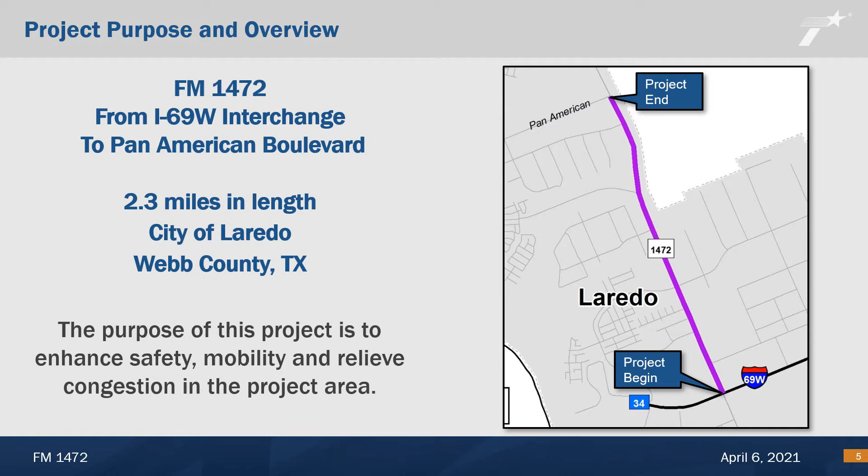Important considerations for the proposed project include enhancing safety and mobility, minimizing right-of-way impacts, reducing delays, relieving congestion, improving traffic flow, and providing alternative local access. The FM 1472 Operational Improvement Project improvements include innovative intersection improvements and traffic signal timing improvements.

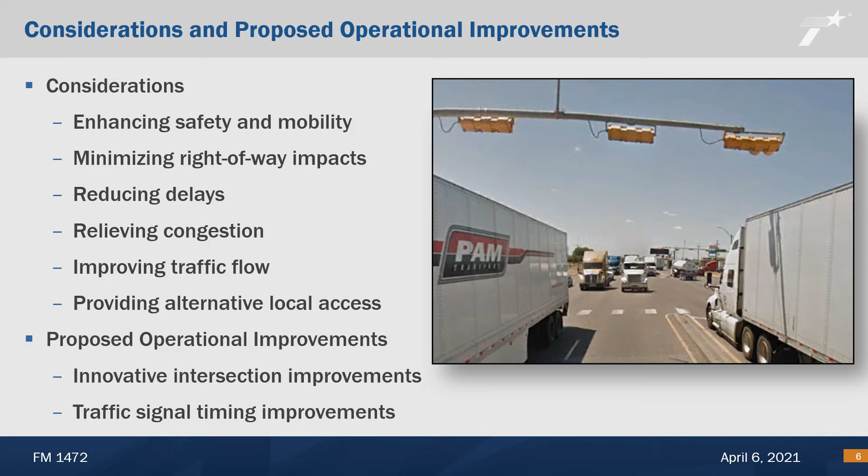Traffic on this corridor is currently experiencing long delays and congestion due to high traffic volumes. This corridor is located adjacent to the World Trade Bridge in Laredo, Texas, which is the busiest inland port in the United States, and the adjacent land uses generate a large percentage of heavy truck traffic. The goal of the project is to improve safety and increase the traffic carrying capacity, or the total number of vehicles able to travel on FM 1472.

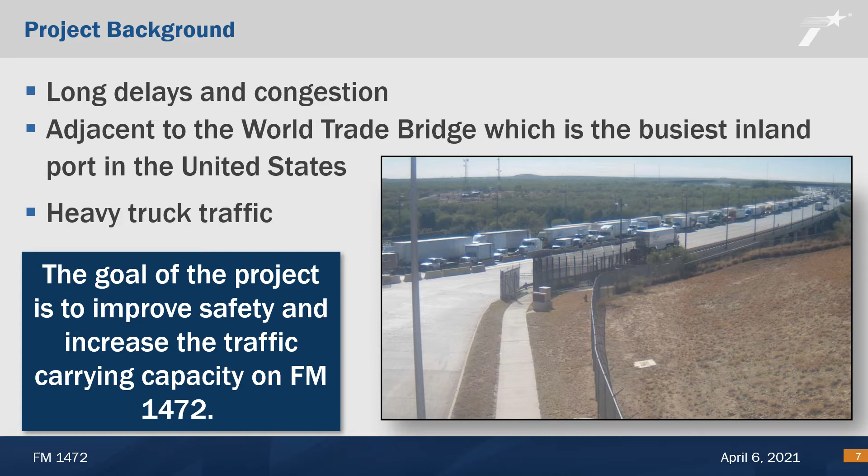Shown here is the proposed four-phase single-point urban interchange to be constructed at the interchange of FM 1472 and I-69 West. The four phases of the interchange will be shown individually on the following slides. The proposed configuration would allow for concurrent left-turn movements from FM 1472 and concurrent left-turn movements from the frontage road approaches. The concurrent movement would allow for a reduction in the cycle length of the signal and would reduce congestion and queues at the interchange.

All intersections shown throughout the presentation have conflict points. A conflict point is a location where traffic paths routinely cross, merge, or diverge. Reducing the number of conflict points at the intersection would improve safety. Conflict points at this intersection would be reduced from an existing 48 to a proposed 24 points.

Phase 1 would allow for northbound and southbound left-turn movements from FM 1472 as shown by the purple arrows. Phase 2 would allow northbound and southbound through traffic and right-turn movements as shown by the yellow arrows. Phase 3 would allow eastbound and westbound left-turn movements from the I-69 West frontage roads as shown by the orange arrows. Phase 4 would allow for eastbound and westbound through and right-turn movements from the I-69 West frontage roads as shown by the blue arrows.

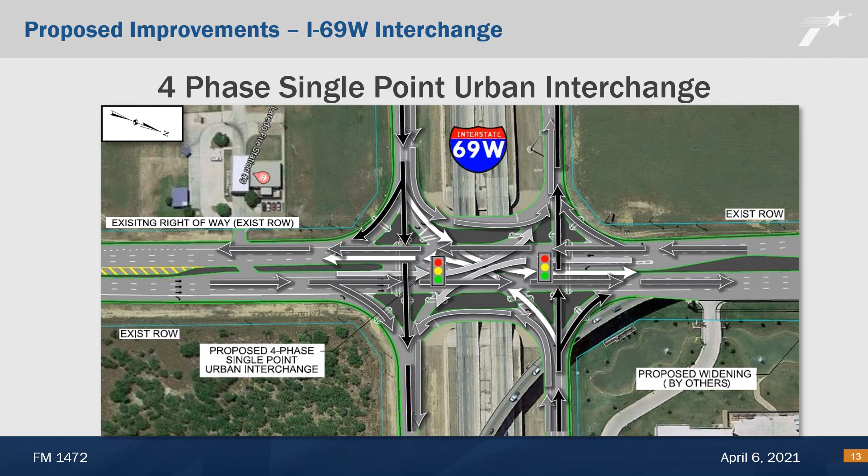All traffic movements, shown in grayscale, for the proposed interchange design allow for an anticipated reduction in overall intersection delays anywhere from 32% to 46% during the peak traffic periods. Conflict points at this intersection would be reduced from an existing 48 to a proposed 24 points.

Shown here is the proposed continuous green T intersection at Milo Road and FM 1472. The proposed improvements would allow through traffic on southbound FM 1472 to travel through the intersection without stopping at a traffic signal, as shown by the white arrows. Left-turning traffic on FM 1472 southbound would use the left turn lane shown by the blue arrows.

Westbound traffic on Milo Road would use a channelized left turn lane and would merge onto FM 1472 southbound traffic, as indicated by the yellow arrows. Northbound FM 1472 traffic would stop at the traffic signal, as indicated by the black arrows.

The conflict points for the proposed intersection would remain the same, but the new intersection design is anticipated to reduce overall intersection delay approximately 45% during the peak traffic periods.

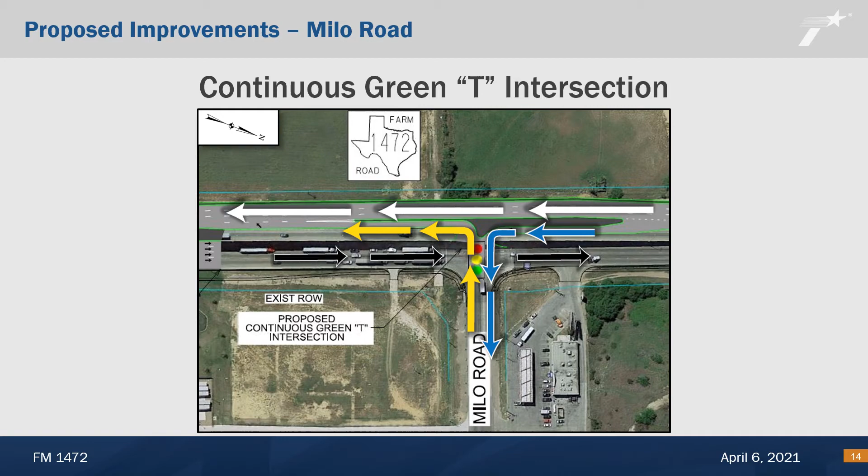Shown here is the proposed median U-turn intersection at Killam Industrial Boulevard, River Bank Drive, and FM 1472. The proposed design consists of one main signalized intersection at Killam Industrial Boulevard and two median crossovers to the north and south. Traffic continuing straight or turning right would be able to proceed as usual. All left turns would be completed by making U-turns at one of the median crossovers.

Drivers on FM 1472 northbound wanting to turn left onto River Bank Drive would continue straight through the intersection, then make a U-turn at the northern median crossover to turn right onto River Bank Drive. See path indicated by the white arrows.

Drivers on FM 1472 southbound wanting to turn left onto Killam Industrial Boulevard would continue straight through the intersection, then make a U-turn at the southern median crossover to turn right onto Killam Industrial Boulevard. See path indicated by the orange arrows.

Additionally, drivers on Killam Industrial Boulevard wanting to turn left onto FM 1472 southbound would turn right onto FM 1472 north. Drivers would then make a U-turn at the northern median crossover and continue straight through the intersection, see path indicated by the white arrows.

Drivers on River Bank Drive wanting to turn left onto FM 1472 northbound would turn right on FM 1472 south. Then drivers would make a U-turn at the southern median crossover and continue straight through the intersection, see path indicated by the orange arrows. The openings in the medians are designed with loons, additional pavement to provide adequate turning space for vehicles.

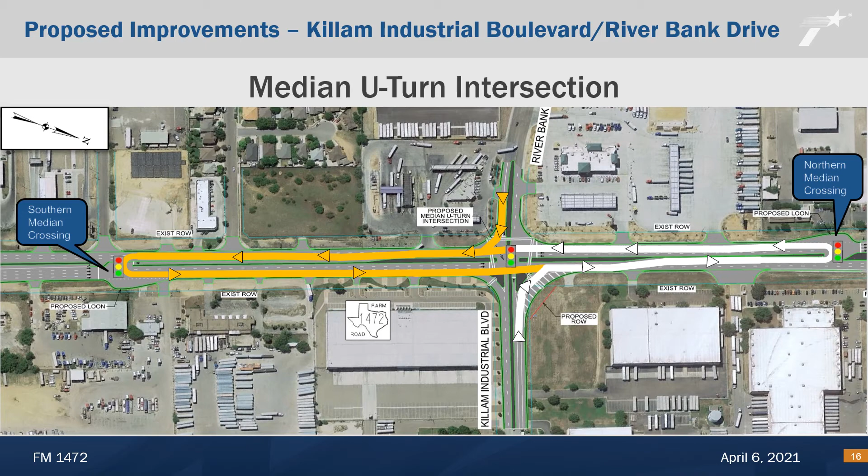Conflict points at this intersection would be reduced from an existing 32 to a proposed 16 points. The proposed intersection design is anticipated to reduce overall intersection delay anywhere from 64% to 69% during the peak traffic periods.

Shown here is the proposed restricted crossing U-turn intersection at Interamerica Boulevard and FM 1472. The proposed intersection design restricts through and left turn traffic movements from Interamerica Boulevard onto FM 1472 at the main intersection, but provides for these movements through a median crossing to the south of the proposed intersection as indicated by the white U-turn arrow.

The northbound traffic would be able to either turn left, as shown by the yellow arrows, or continue straight at the main intersection, as shown by the white arrows. FM 1472 southbound traffic would operate as it would today.

Conflict points at this intersection would be reduced from an existing 9 points to a proposed 8 points. The new intersection design is anticipated to reduce overall intersection delay anywhere from 12% to 16% during the peak traffic periods. An additional portion of the proposed intersection is shown for display purposes as it is currently platted for construction by a private developer.

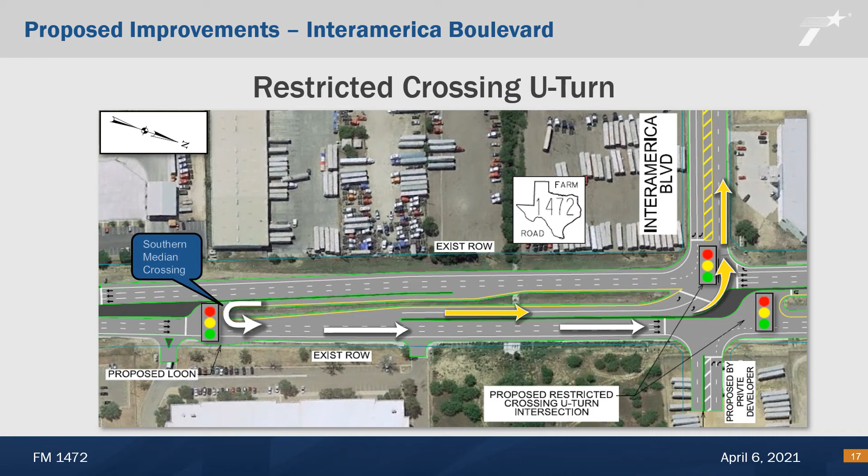Shown here is the proposed restricted crossing U-turn intersection at AF Moeller Boulevard and FM 1472. The proposed intersection design restricts through and left turn movements from the cross streets. Traffic would turn right from the cross streets and utilize the median crossovers to the north, as indicated by the white arrows, and south, as indicated by the yellow arrows, of the main intersection.

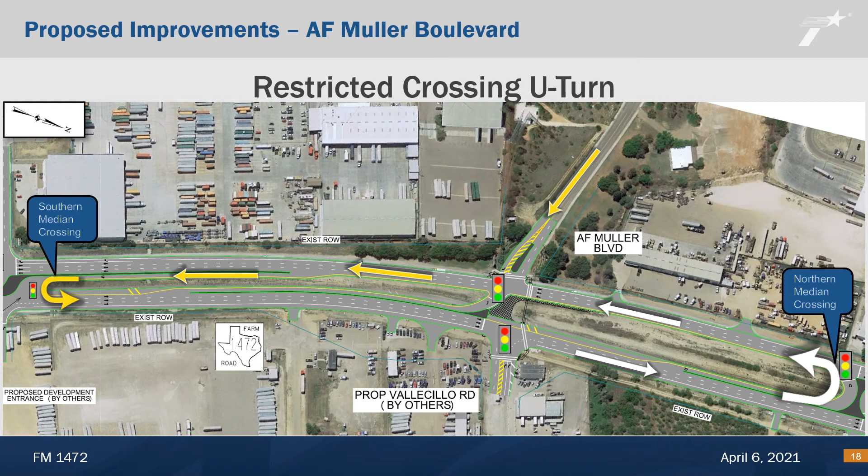Through traffic on FM 1472 will operate the same as it is currently. Conflict points at this intersection would be reduced from an existing 32 points to a proposed 8 points. The new intersection design is anticipated to reduce overall intersection delay anywhere from 62% to 87% during the peak traffic periods.

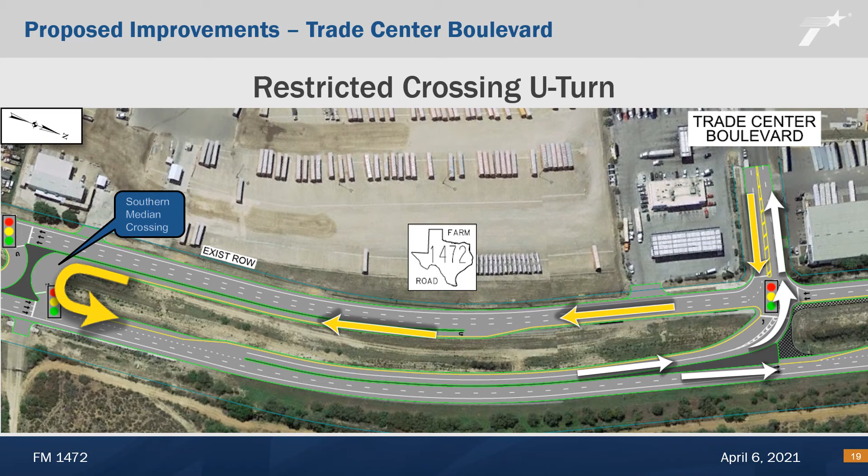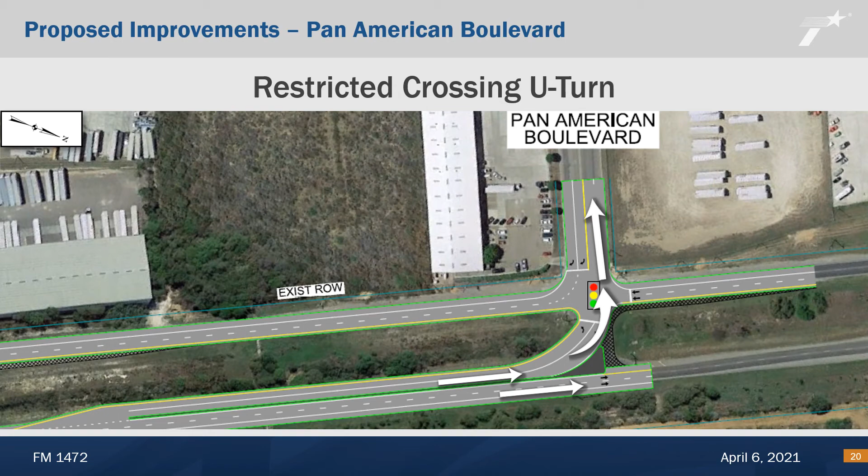FM 1472 northbound left-turning traffic would be controlled by a traffic signal, but northbound through traffic would not be controlled by a traffic signal, as shown by the white arrows. Conflict points at this intersection would be reduced from an existing 9 points to a proposed 4 points. The new intersection design is anticipated to reduce overall intersection delay anywhere from 34% to 57% during peak traffic periods.

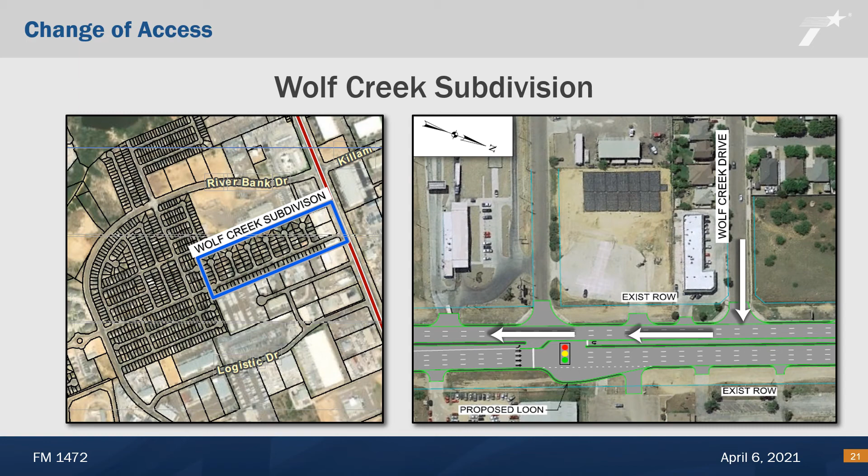Access to FM 1472 northbound would be restricted from Wolf Creek Drive. Wolf Creek Drive traffic would not be able to access the proposed U-turn, as there would be a raised curb for the U-turn lane. Due to safety concerns of traffic exiting the Wolf Creek subdivision, the existing northbound left turn lane onto Wolf Creek Drive would be removed.

With the removal of the existing left turn lane, northbound FM 1472 traffic would continue straight through the intersection, then make a U-turn at the median crossover to turn right onto Wolf Creek Drive, as indicated by the yellow arrows. The proposed changes would eliminate 4 conflict points on the southbound lanes of FM 1472.

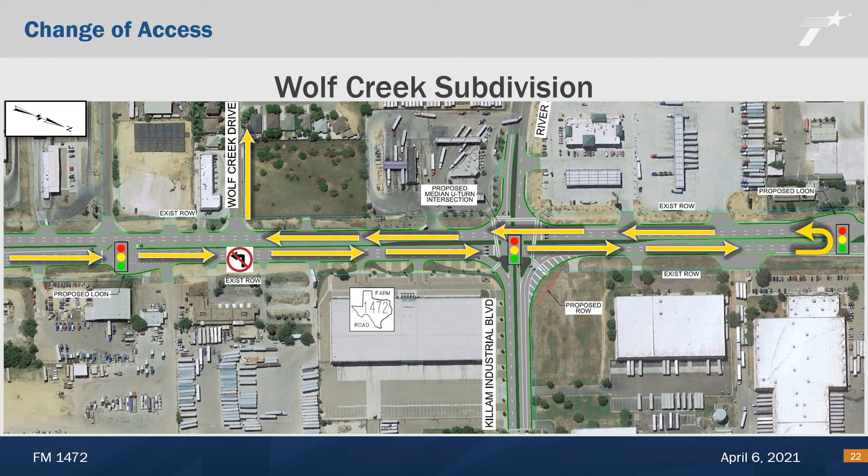The project has an anticipated construction cost of $4.5 million and a total project cost of $5.2 million. Construction is anticipated to begin in 2022 and anticipated to end in 2024.

The environmental review, consultation, and other actions required by applicable federal environmental laws for this project are being or have been carried out by TxDOT pursuant to 23 U.S.C. 327 and a Memorandum of Understanding dated December 9, 2019, and executed by FHWA and TxDOT. All proposed work being considered in this study is within existing TxDOT-owned right-of-way.

Archaeology and historical resources were evaluated for the proposed project. It was determined that the proposed project would have no impact on either resource. Biological resources were also evaluated for the proposed project, and it is anticipated that there would be no significant biological impacts. No water resources, protected lands, or refuges were found within the project area.

Due to the nature of the proposed project, the following environmental subject areas were not applicable to the project and were not evaluated: air quality, traffic noise, community impacts, and hazardous materials.